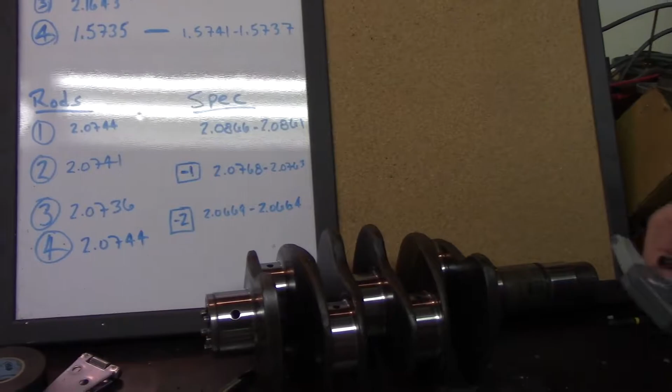I got a call from the machine shop today that our crankshaft was done, and so I went and picked it up. We're also testing out a new mic, so maybe you can hear me a little better.

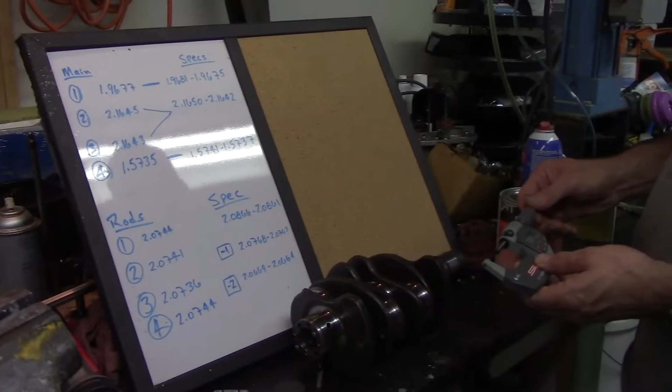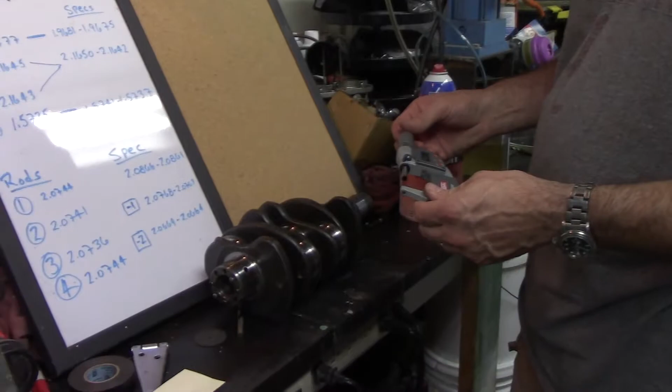So I went and picked it up, and they said they had to turn the rods 20 under and the mains 10 under. So I went through, and I don't know if I'll bore you with all this, but I'll use the digital mic just because it's easier to show you.

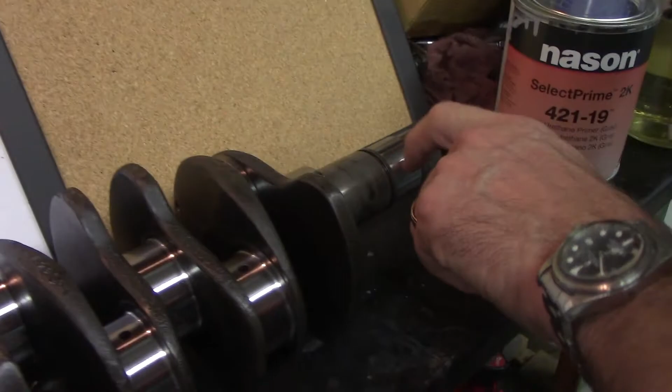And so, for example, number 4, which I know that main was the one that was questionable. It was slightly under. So number 4 main is 1. Well, you can see the number. So we'll go ahead, and this is the one that's out at the end where the pulley is.

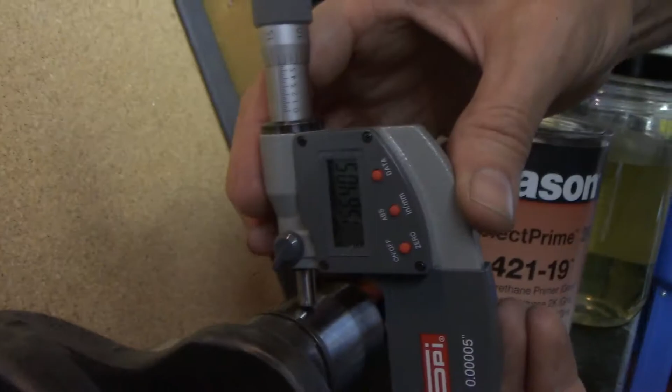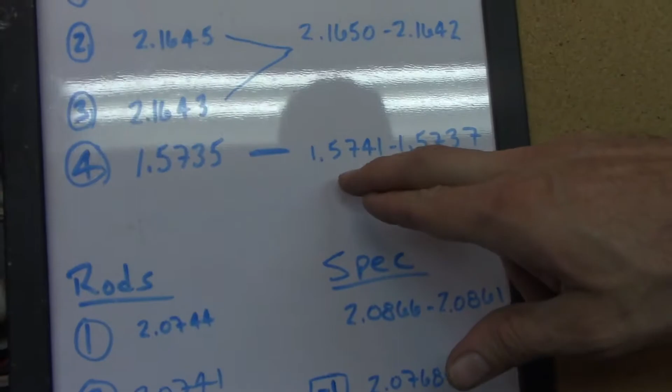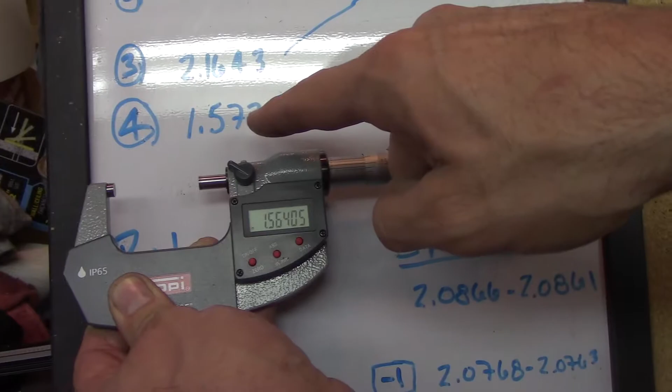So, 1.56405 inches. So if we're 10 thousandths under that, we should be. This is the spec. That was what we were before because we were under. So spec's 1574. We're 1564. So that's like spot on.

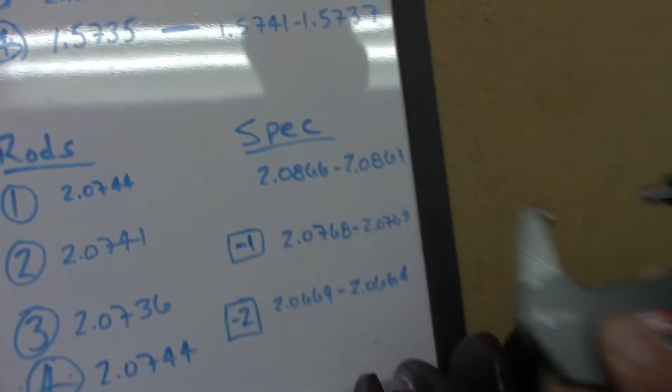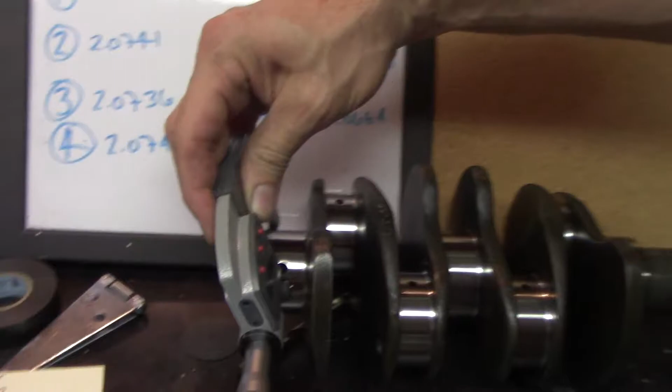Let's see. Then next, that'll use a 1 to 2 mic, is the number 1 main. Those are the specs. That was our before. Number 1 main is the one up here by the flywheel, and that is the thrust surface.

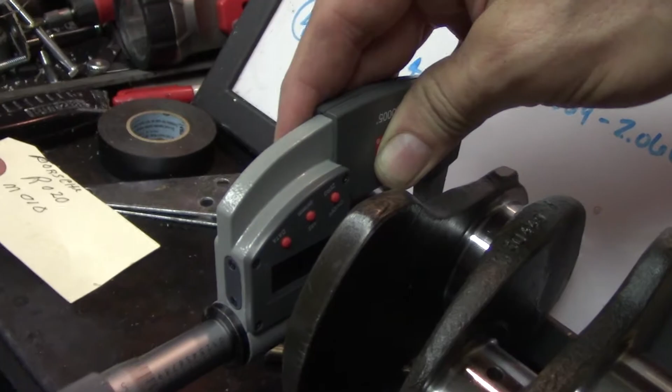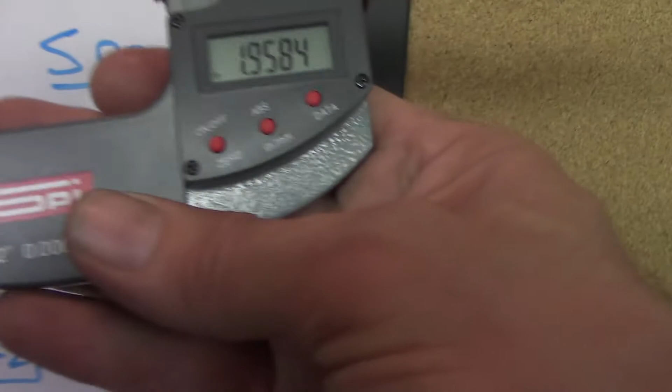19584, 19681. So that's probably a little loose. It was spot on when I checked it earlier. So we're good there.

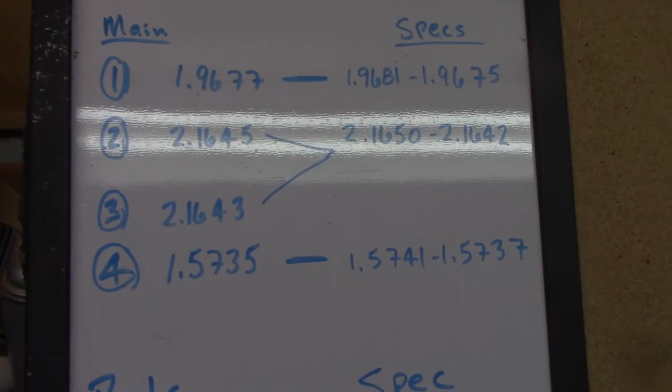Now let me switch to the, everything else is taking the 2 to 3 mics. So let me get that mic out and we'll do that one. We're back with the 2 to 3 mic. Just kind of takes a little feel, make sure you got the right measurement.

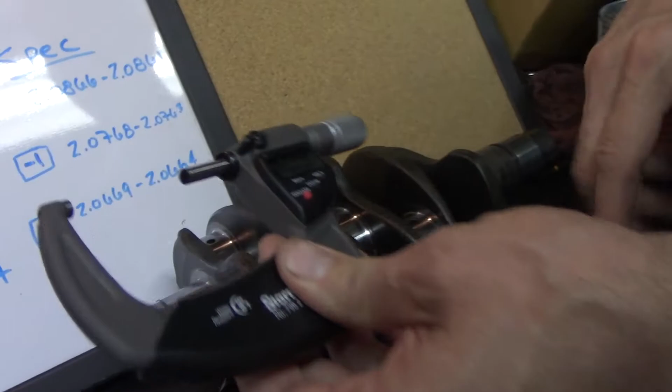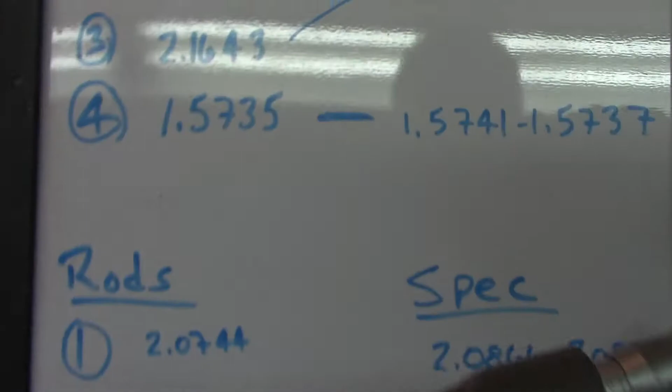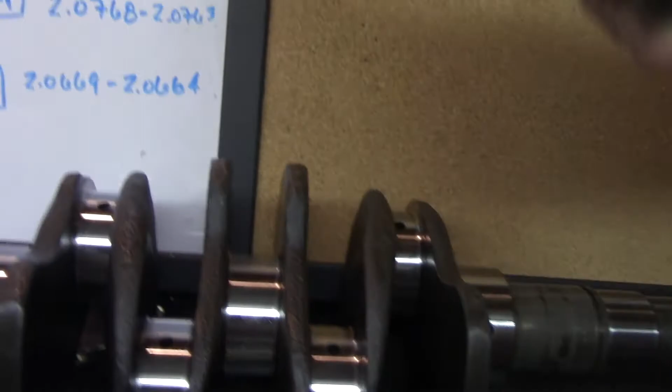So this would be the number 2 main. So we have to add 2 inches of that. 2155. Spec is 2165. So we're 10 thousandths under that, so that's right. We'll do the number 3 real quick because that should be darn near identical. 2155. So we're good on that one.

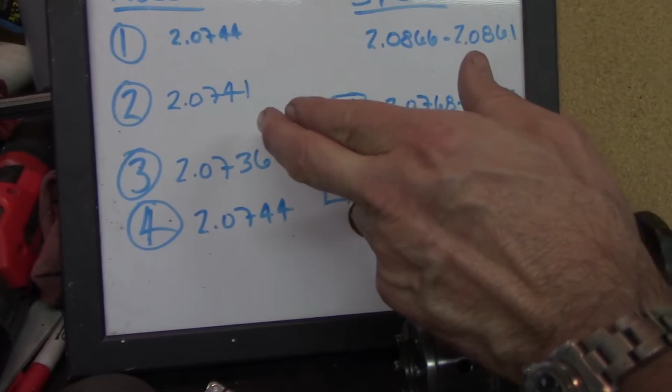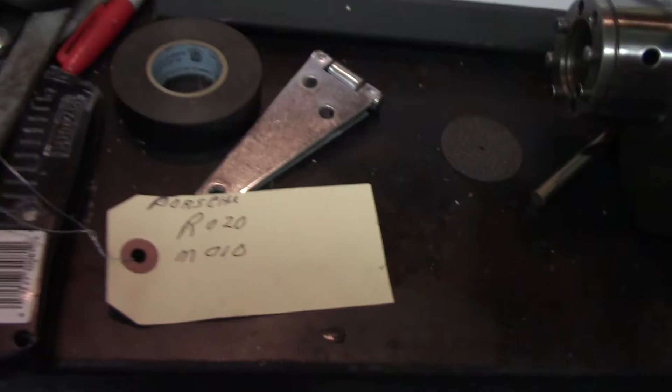Now we will go to the rods, and I won't do all of them, but if you remember from my previous videos, they were in no man's land. They were between the -1 and the -2. Said they turn them 20 thousandths under, which is 0.5 millimeters. So we will go up here to, well, we'll pick a rod. We'll pick this rod.

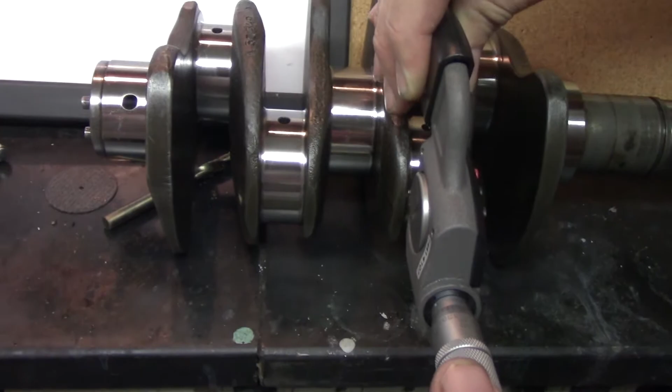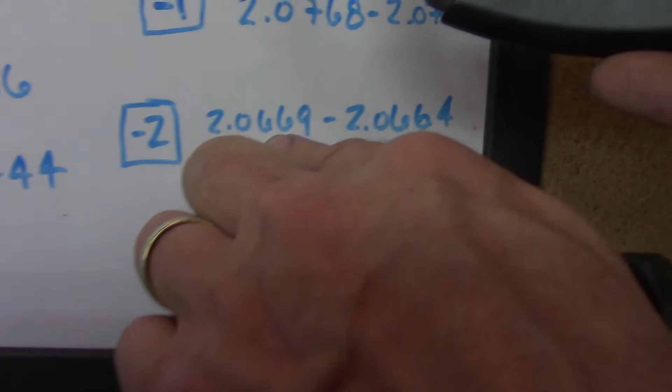All right, that's pretty close. 2066. Specs are 2086. So 20 thousandths under, right there. So we are good to go on this.

Now I'll go on and spend a boatload of money on some rod bearings and main bearings. The rod bearings are fairly inexpensive. The main bearings were like $300+. So I'm going to go find the deal on those, figure out my best choice for them, and I will get them on order, and we'll start putting this back together soon.